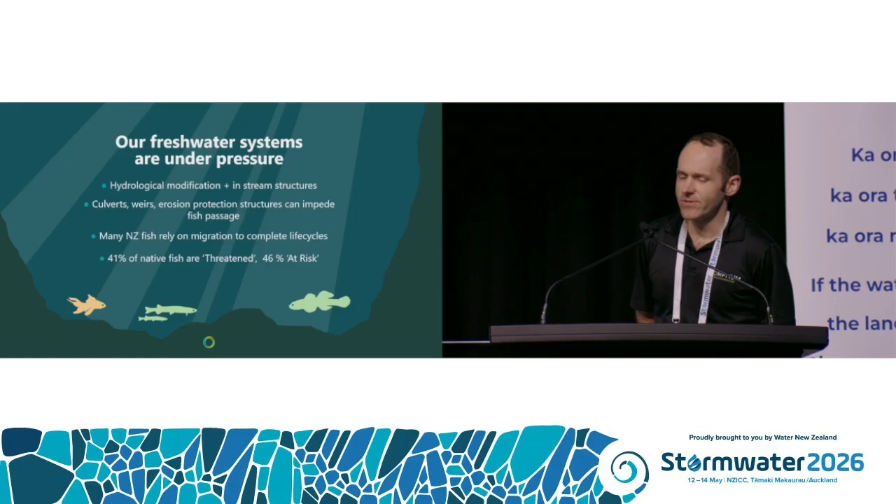And I have up here on the slide some statistics around just how badly our freshwater fish are suffering, and unfortunately they're already out of date. There's news out of last week and the numbers are trending in the wrong direction. However, this has been recognised in the regulatory framework, and back in 2020 we had a new tool in the toolkit to start addressing these concerns called the NES-FW, or the National Environmental Standards for Freshwater.

Now this was a major step forward. I can't stress that enough. It was the first time in many places that we got codified sets of rules, regulations and conditions around what some of these in-stream structures need to look like in order to facilitate fish passage, and it was probably the first time many people heard the term fish passage.

And this is a change that's being picked up and reflected in the stormwater industry, to which Theo is going to speak to further. Yeah, so stormwater is changing. We're moving away from this conveyance approach of getting water out of a catchment as fast as possible, as it's starting to damage our streams and receiving environments like the coast.

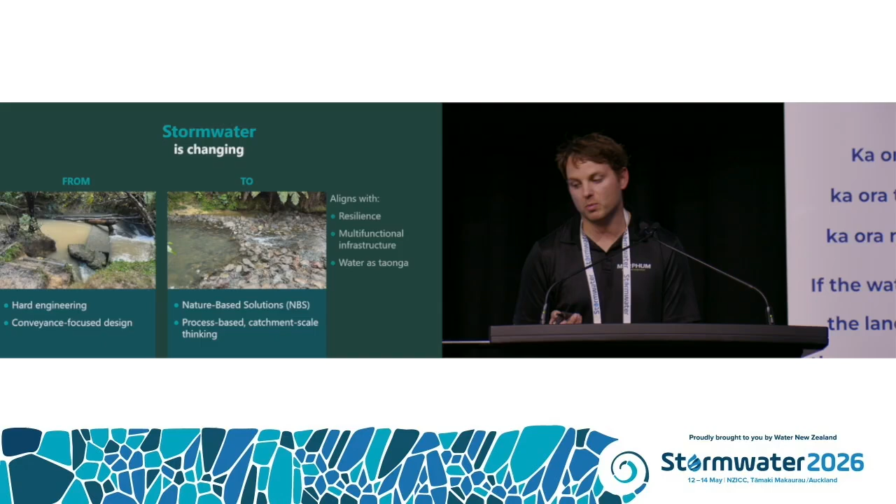We are moving more towards these catchment-based approaches and process-based design, and these nature-based solutions in streams that mimic the natural processes of streams. So these can help provide resilience, because they can move with the dynamic nature of streams, and they act as multifunctional infrastructure where they are great from a geomorphic perspective, a stormwater management perspective, ecological habitat and ecological connectivity perspective, talking about fish passage, and also aligns with the theme of the conference, water is a taonga, and restoring the mauri of our streams.

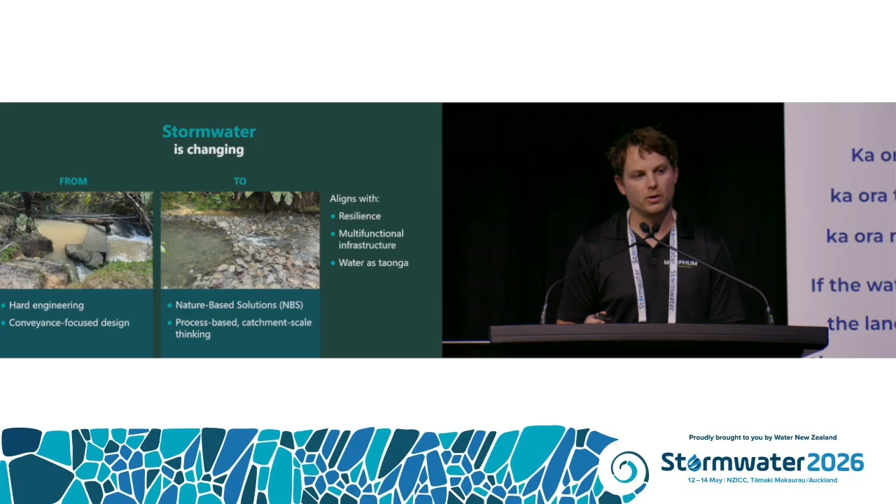Oh, sorry, still me. One example of these nature-based solutions in streams is the humble rock riffle, or one of these timber cross-vane weirs. So the key component of a riffle is a line of boulders in a V shape in the stream, which creates a constriction and attenuation, which then creates this bathtub upstream of a riffle, which creates these low flow velocity zones in these rainfall events we're designing around, and reduces erosion. But they can also be designed from an ecological and fish passage perspective to raise the water permanently to remediate vertical barriers such as perched culverts.

Okay, cool. And so now the link. Unfortunately, many of our nature-based solutions are being interpreted within the confines of the NESFW, which means many of those structures that you've just seen are being interpreted as weirs and are having the rules and regulations for a weir applied to them. And this creates a disconnect where we have design outcomes set at a national scale, which don't quite reflect the NBS design approach, which is inherently more place-based, thinking about the reach scale and what is happening in that stream, focusing on processes at that more local scale.

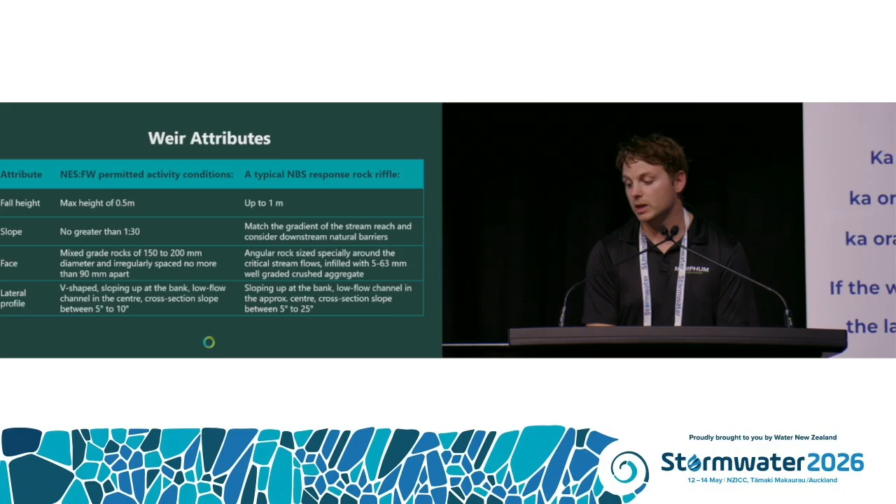And the next one I will talk to is rock size. At the moment it's prescribed that rocks have to be 150 to 200 mm in diameter. So is this taking into account confined urban streams or wide rural rivers? The rock size needs to be determined based on the hydraulic conditions of the stream, the flows and the velocities. So we need a wide range that fits those criteria, and a wide grading to create interlocking structures that are robust and also avoid water permeating below the surface, keeping that water on the surface so we're not creating a bigger fish passage barrier in the process.

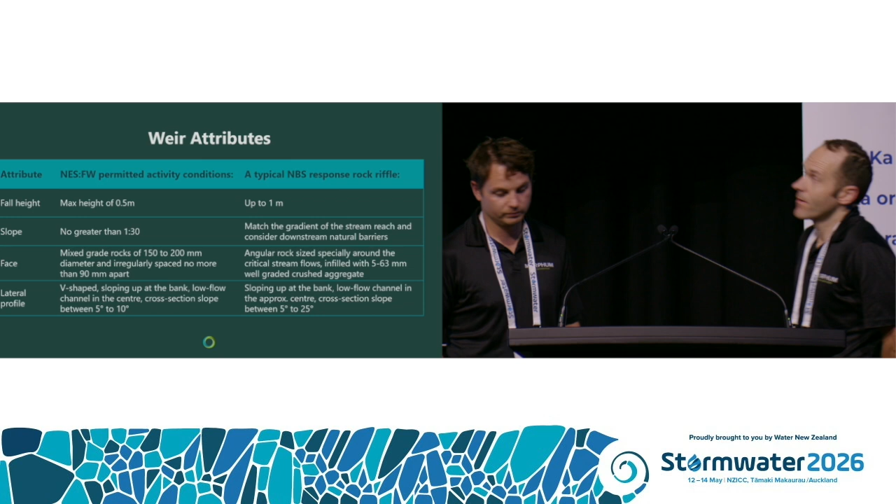Cool. So this slide is just a summary of what we had before, where there is that disconnect between an effective design and those prescriptive outcomes versus a compliant design, which can miss the nuance and what is actually happening within that stream and what needs to be considered within that specific context. Theo, in terms of your work, how does this matter?

Yeah, why this matters. So typically when you think of a permitted activity, you're thinking this is going to be faster, I don't have to go get a consent that can take a long time. This is going to be cheaper, I don't have to prepare all the supporting documents for a consent. And you think it's going to be lower risk because you're not going to have the obligations of these unknown consent conditions that could be put on you. And you're just going to assume that it's going to have the best ecological outcome because it's permitted.

However, what's happening with nature-based solutions is you're ending up with these bigger impacts on ecological bed disturbance, these higher costs from materials, and it's creating this paradox where the very rules that were made to enhance these environmental outcomes are actually starting to deter designers from getting the best outcomes from these nature-based solutions. Cool.

And so the solutions, note the S and note the question mark. We don't pretend to be the font of all knowledge and have the exact silver bullet, but we do have for you today 4 discussion points that we think are worth considering as this conversation advances. The first one is a shift to the nature-based process framework. Rather than focusing on the outcome, the weir must have a rock size of a certain diameter, how do we determine this? We know those sorts of approaches.

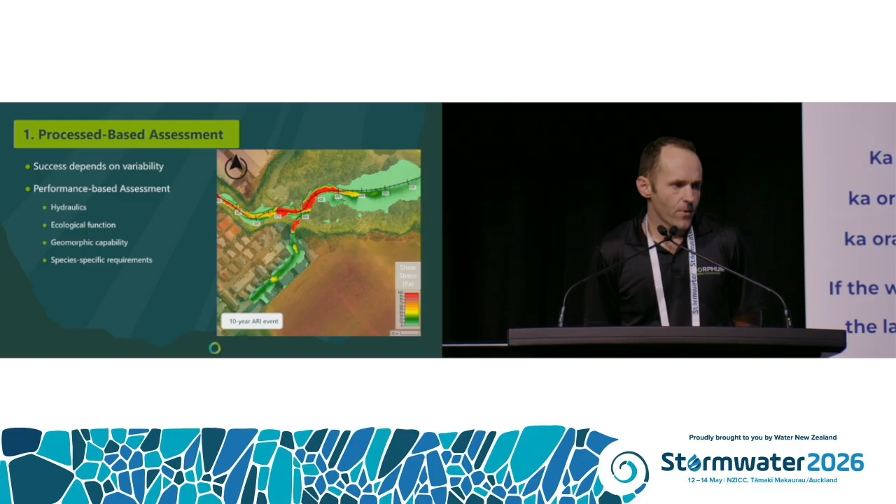Engineers will use the same methodologies, but we can manage for those processes rather than the outcomes, which will be there at the more local scale. We can look to the hydraulics, the ecological function, the geomorphic capability of that structure with the stream, which includes sediment transport through the system, which is part of a natural system. We also need to consider what natural fauna is found in that stream. As Theo was mentioning before, if you have a waterfall immediately below your culvert, there's little point in providing passage for fishes that cannot naturally surmount that obstacle.

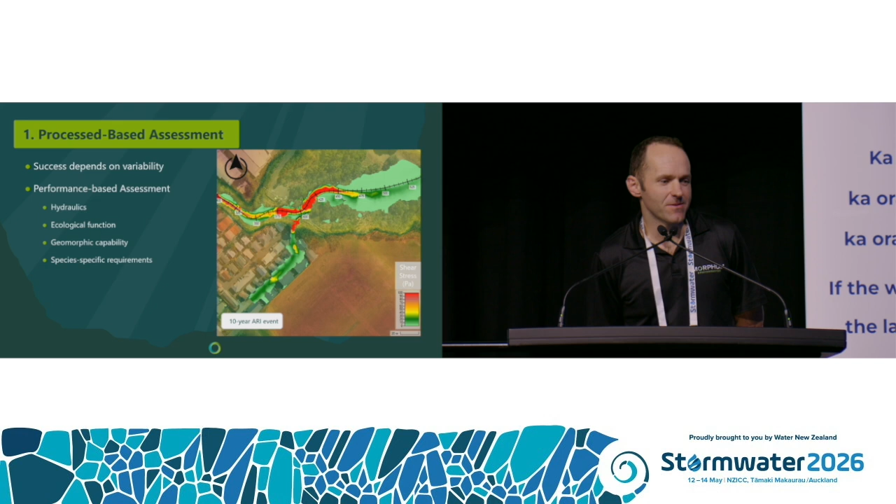Theo, do you want to talk us through an applied example? Yeah, when you hear the term nature-based solution, you may think, hippies. And they're just randomly placing rock within a stream based on the vibe. But there's actually a lot of technical processes and assessment that goes behind it. Here's a little snippet from a HEC-RAS model in a stream in Auckland. You can see there's a whole bunch of red in there, which is showing the shear stresses in a stream, which are the forces which are parallel to the stream flow.

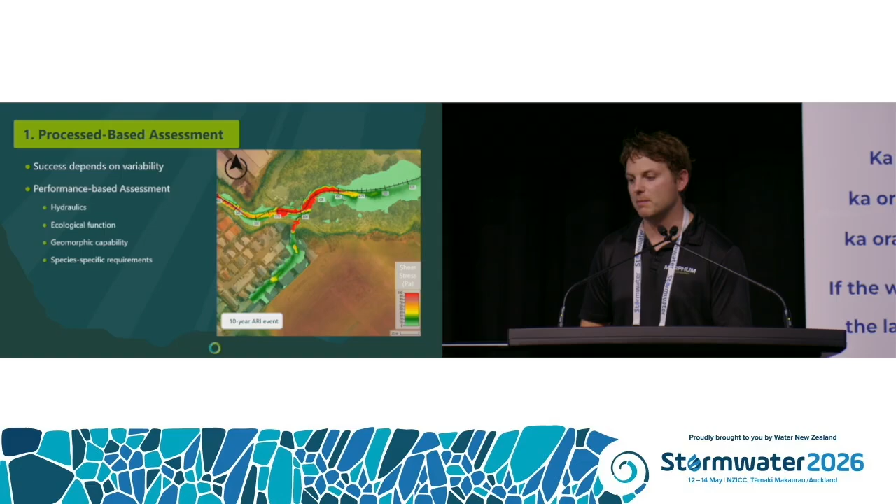And when you combine this information with the shear strength values from these geological materials that are found in these stream beds and stream banks, you can identify how much erosion is going to happen, where it's going to happen, and where the sediment may be mobilized and then enter into our receiving environments. The same goes for velocity as a key indicator from the hydraulics perspective.

In this slide here, we've got a whole section of red, which is representing over 4 meters per second of stream velocities. But when we put in some rock riffles in this slide here, which are the purple lines, you'll see now there's a little bathtub of low flow velocity upstream of each of these riffles, which are now less than 1 meter per second.

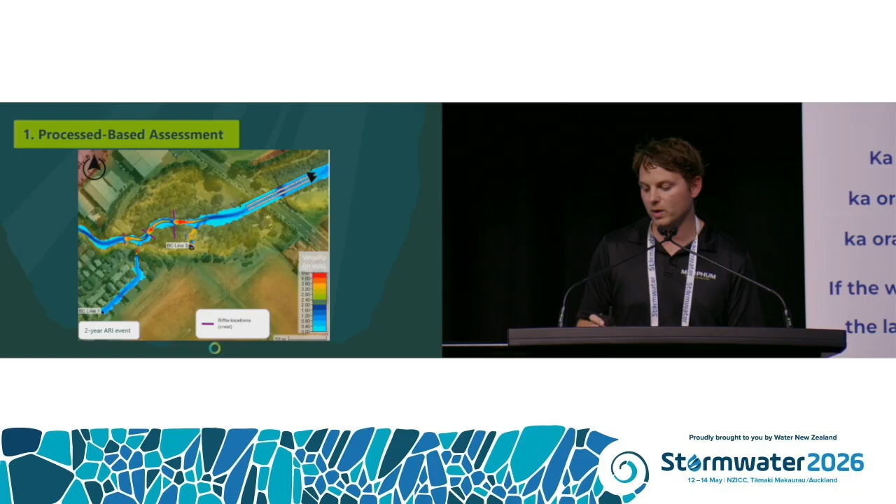And you'll see that there are still little red spots on there, but these are where the riffles are and the rock armouring is, which prevents streambed incision in these areas, and we're creating these low flow areas where they need to be in these critical points within the stream.

Cool. Now our second point is recognition for NBS solutions. It may come as a surprise to many of you that weir was not previously defined in the RMA, nor in many regional plans. And I think that's because we know what a weir is. We understand them as these sorts of structures, devices we put into streams for water abstraction, water takes, or for flow gauging. And I hope from our presentation today you have taken away that what we are designing for now in the nature-based approaches is fundamentally a different kind of structure, and perhaps it's time that it had its own regulatory framework around that.

Now the third point we have here is what we've called pragmatic or global consents, which speaks to one of my areas of professional interest, early engagement with regulatory. Regulatory services probably do not want to be processing a single consent for every structure in a stream or every NBS-style solution that may require one.

Under a global consenting framework, you can engage with regulatory to establish a program of works and a framework, how these structures are going to be designed, how effects are going to be managed, and deliver project by project under that program of work. Yes, there may need to be levels of detail depending on the risks or the effects identified, but it will help with that consenting process and help get us unstuck when we do have to go through that consenting process, structure by structure. And Theo's also going to speak now on our final points.

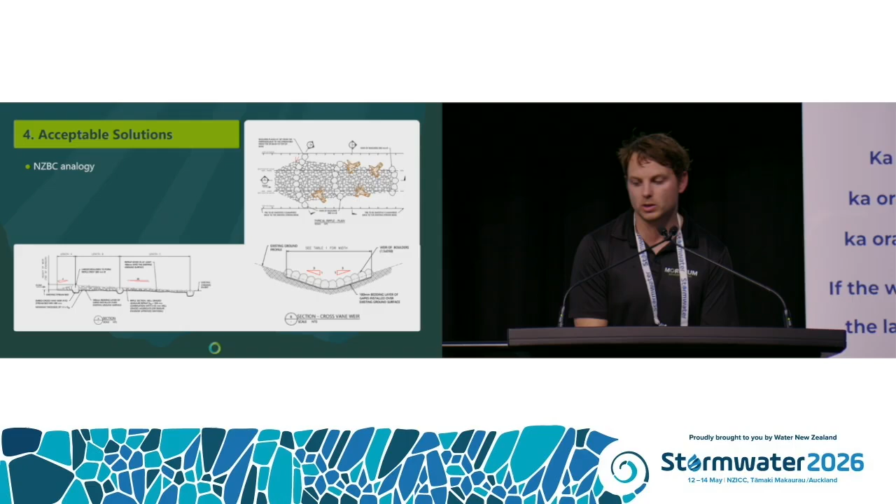Yeah, so in my previous career as a structural engineer, I got to work with the New Zealand Building Code a lot more than I do now as an environmental engineer, but we use these things called acceptable solutions. And what acceptable solutions are, they're defined by central regulatory, and they set out a process to be followed, which is evidence of compliance. So the Building Consent Authority has to accept it because it's a pre-approved design methodology.

It can also be used to create these design envelopes or swim lanes within a level of acceptable risk, which work really well with nature-based solutions with these dynamic systems and changing sites and different widths of streams and things. And we think they could work quite well, and they could help alleviate consenting burdens and the costs associated with that, and allow for these widespread rollouts of fish passage projects, which could all be under one consent within these design envelopes.

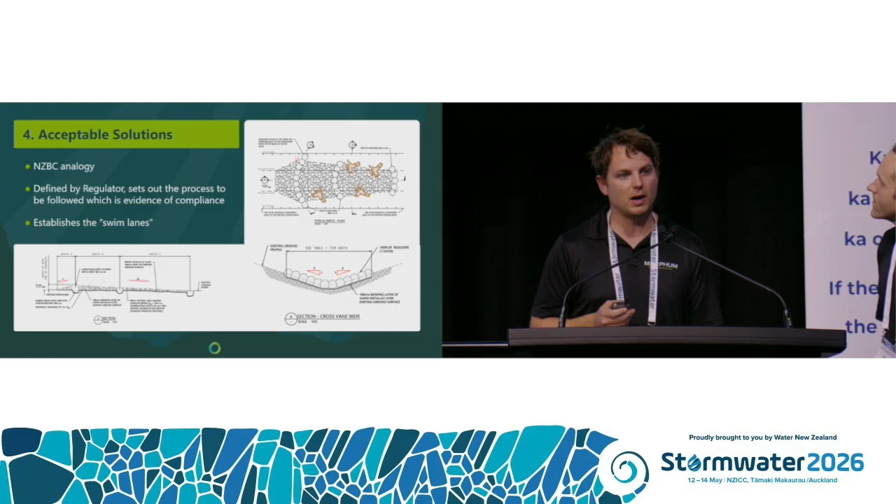And with the example of the rock riffle, we could have these standardized drawings that accompany them, and they have to follow those attributes that we discussed in that table earlier in the design envelope, and then also be accompanied by some standard construction specifications that are easily followed by a streamworks contractor.

Yeah. Thank you. So we see ourselves as being at an inflection point. The NESFW has gotten us so far and it's taken us massive strides forwards, but it's time for us to take it one step further. The intent has been positive, but at times the implementation is constraining our solutions. We think the shift needed is a change in focus from what structures should look like to how they should function and interact in their local context.

We believe that if we get this right, we have the opportunity to not only improve fish passage and achieve better stormwater outcomes, but we can also do it for a lower cost and at a scalable delivery. Thank you very much. It's been us.

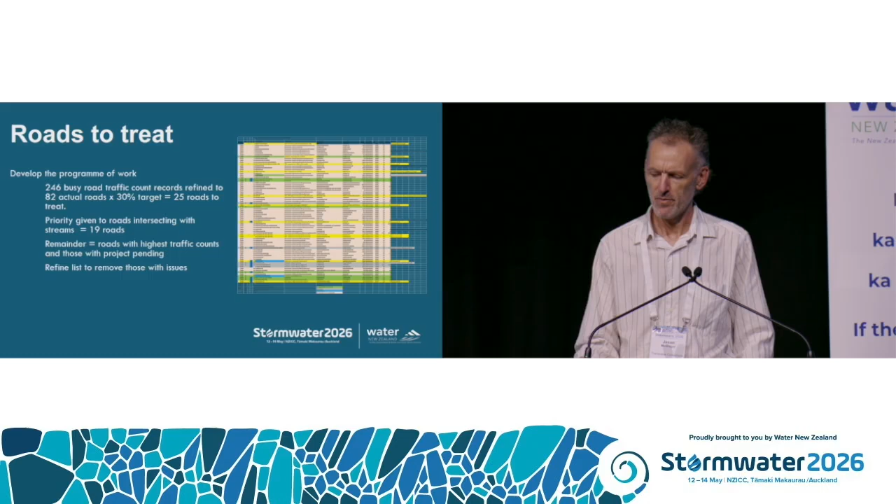Luckily, Auckland Transport has a very good GIS traffic count portal that enabled all this information to be utilised and sorted into some very long lists and lots of spreadsheets on my end. And then that ended up being down to a lesser number, obviously, of actual roads, so 82 actual roads, and then applying the 30% target to that, we ended up with 25 roads to treat,

which doesn't sound like very many, and it seems like a very simple work program, but then it was a case of looking at those roads and figuring out which ones are actually going to be worth taking forward to do something with. And just as the slides got in there, there was priority given to roads that intersect with streams ahead of just the general list of roads.

The graphic that's on the screen now is more of a recent version of a spreadsheet that I produced, and you can see the ones that are the paler colours are all crossed out. These are roads where, going through it, looking at maps and various data that was available, we worked out that those roads are not going to be suitable for retrofitting a treatment device to.

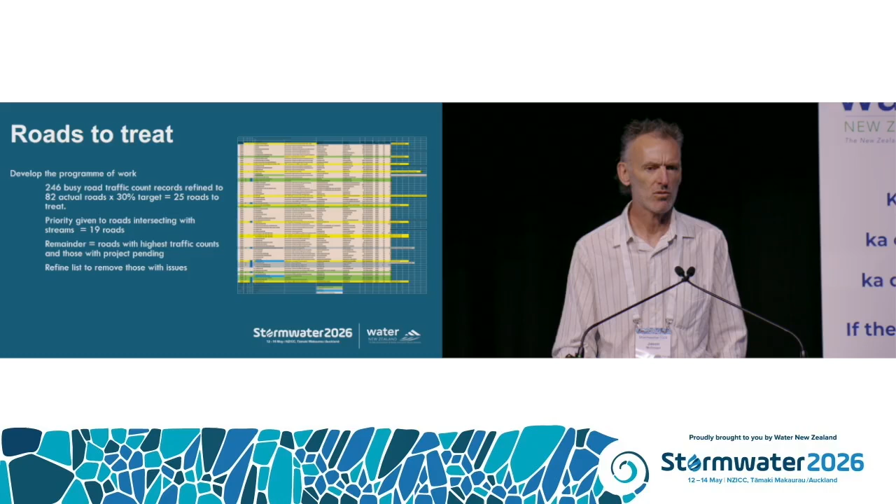So as much as there's 25 roads to treat, actually some of the challenge has been coming up with 25 roads that actually are going to be suitable for retrofitting a stormwater device into. So yeah, there's been a continuous process of refining that list, revisiting it, and we're still doing it again now, just trying to iron out some of the roads that have problems.

So once we had that list of the roads, then it was a case of going out and finding out what everyone else is doing in the council family and others, and that involved a lot of meetings and a lot of conversations, which was good, but the challenge with all that was trying to find out what people are doing, when they're doing it, and trying to get the stars to align so that we could progress our piece of work and ideally fit it in with other people's work to avoid digging twice or disrupting other users.

Some of this also involved checking with Auckland Transport, which has a big capital works program, and going through lots of project managers finding out what projects they were doing and where. It was mixed results with that. A lot of times the timing just didn't work. We weren't going to wait on them. They hadn't waited on us, say, and they'd already progressed. Budgets just didn't align as well.

We also have a standing meeting with Auckland Council Healthy Waters where we discuss their program of work for contaminant reduction work. But they tend to look at larger catchment scale programs of work, whereas we are looking specifically at roads, or sections of road only. So yeah, the overlap in those didn't always work.

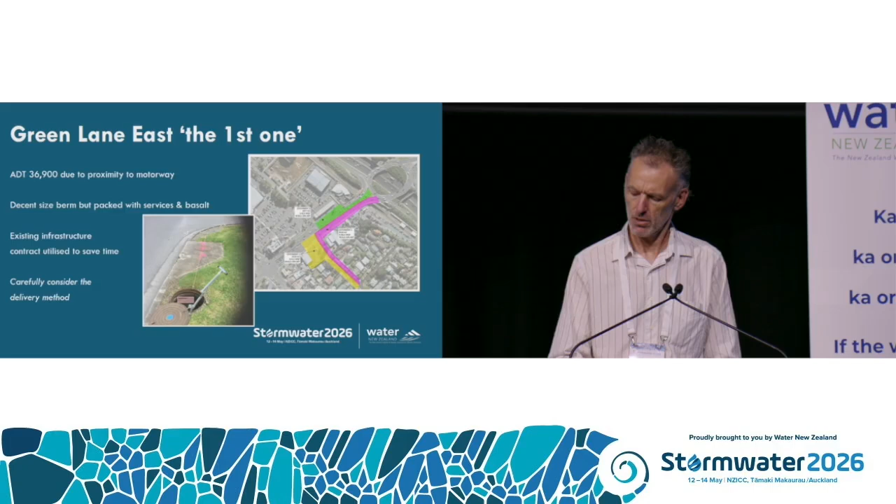This next one is Glenfield Road, and I've called it False Start because it got into investigation and part of a design before the challenges on the site meant we really had to pull it. It's a busy road, 29,000 vehicles a day, and once the consultant got into it, we realised that there's too many constraints in terms of the catchment makeup, and it would have meant lots of devices in the road or a downstream device which then ends up becoming a Healthy Waters asset. There's particular divisions around who owns what assets in Auckland. So it was decided to not progress that one any further.

And again, the lesson learned from that one was to do some more upfront work to make sure that some of these constraints were identified sooner.

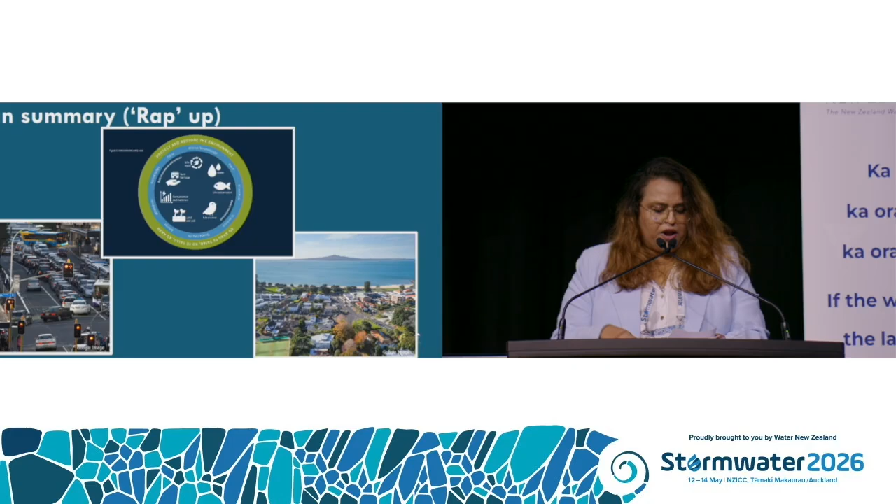10-year plan, 5 targets aligned. Hīkina te Wero lifting the bar every time. Not every road, no, we chose with intent. 25K, that's where the effort went. High loads, high flows, that's the play. Biggest gains first, that's the AT way. Not theory on paper, not a shelf life report. We are building solutions that the network supports. Do you feel the beat? Do you feel the shift? From design to maintenance is a mindset lift.

Space is tight, yeah, constraints are real, but we make it work. Device by device, deal by deal. All roads, tight berms, services everywhere. Green where we can, but it's gotta play fair. Safety, access when the traffic's live. Maintenance matters, that's how solutions survive. Adaptive program, learning as we go. Progress over perfection, getting treatment on the flow.

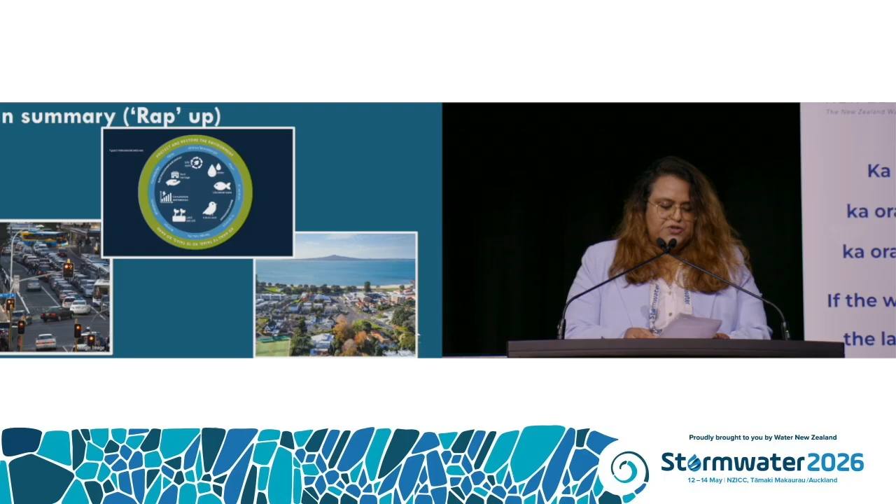It's not just pipes, it's mauri, it's why. Te mana o te wai, not just words we say, it's why we show up, do the mahi each day. Managing our discharges, yeah, that's the aim. Balancing roads while protecting the same. Busy roads, big loads, keeping them in check. Auckland Transport respects the network, respects the wet. Ka pai, mauri ora.

Wowee, who's going to top that? That was awesome, well done. All right, any questions? Don't forget to say your name and affiliation.

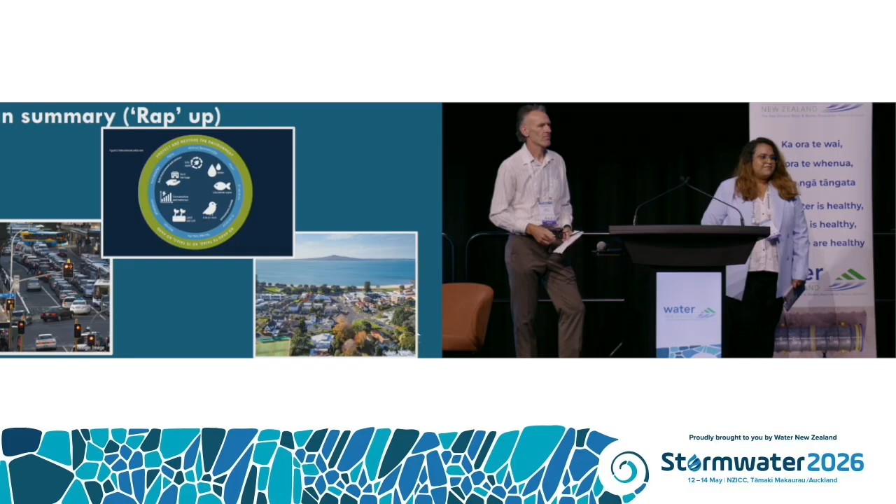Thank you for that. That was incredible. Really appreciate it. My name's Rianne Ingley. I'm from Auckland Council Environmental Monitoring Division. So my question is, naturally, do you have any plans for water quality monitoring of the effectiveness of your initiatives?

So for us, when we are looking at the requirements, most of the performance-based are looking at the removal of contaminant loads, and most of these GPTs are designed to at least meet that 75% TSS removal and associated contaminant loads. So for us, the performance-based sits over there. Monitoring is actually done by council looking at other contaminant loads coming up from the whole catchment. Kathy is going to be speaking later today about the tire wear particles and how they're ending up in our marine environments. So that is an emerging contaminant. Well, it shouldn't be an emerging contaminant, but it's a contaminant that's coming out. And so there's going to be more research to be done.

But when it comes to performance-based, it's based on the design performances of these solutions that are being added in. So not monitoring as such, but it is based on the principle that it will remove those contaminant loads coming off the roads. And I'll just add, we are in talks about the devices that are already in place, finding out how they are performing, seeing what maintenance has occurred and what they've actually taken out of them. Yeah, just to add as well, we have a service level agreement with the Healthy Waters operations team, who go out and do all the removal of contaminants within these devices as well.

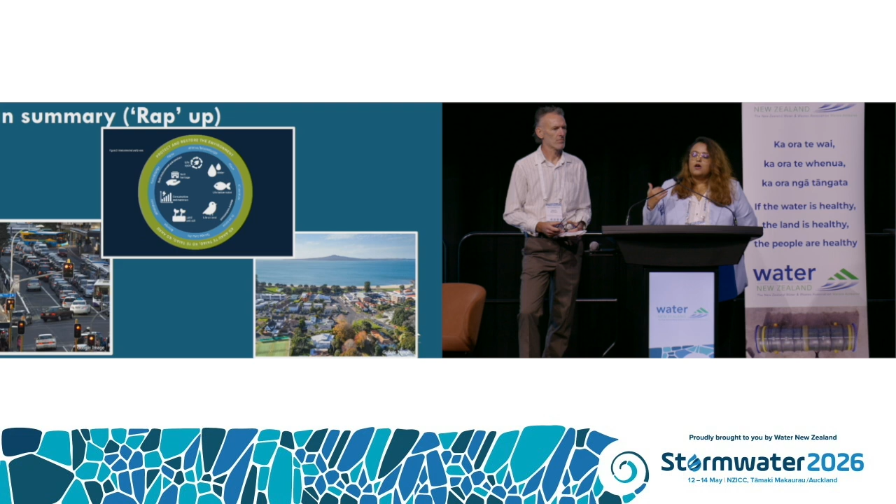Hi, Abby and Jason, that was really great. Sorry, I'm Marissa from Harrison Grierson. With AT coming back into the Auckland Council family, do you see any opportunities for more joined-up solutions with Healthy Waters? I think even before coming in, we have been doing those collaborations and discussions. Jason had already spoken about it in his slides. We're looking at a land use activity basis, whereas other council families are looking at regeneration of catchment planning. So given that we have those busy roads in those areas, we are having conversations where we want to put interventions that have the best outcome. So those discussions are already happening, regardless of when the move happens.

And I think the other aspect to this is that as much as we're doing this program of work, ideally we'd like to raise the profile of these busy roads that are out there untreated. So if other people are doing works, doing projects, that they actually think about, okay, while we're there, we can add some stormwater treatment in at the same time. So that it shouldn't ideally need a work program. We can keep the work program going, but just for others to actually try and think of stormwater a bit more in their projects.

Hi, I'm Martin from Auckland Council. Just in regard to this targeting, I love the approach. Do you feel like there's scope there for even further targeting? I understand it's an easy approach to just go for your big 25,000 plus, but I'm thinking very heavily around industrial park areas right next to streams. You've got very specific contaminant loading happening there. Daily traffic counts of trucks. Trucks producing much different contaminant loads to your daily vehicle. So I guess, is there another targeted approach you'd look to implement in future after the scope of this program, rather than, like you say, the 25,000 vehicle per day might not be the best approach?